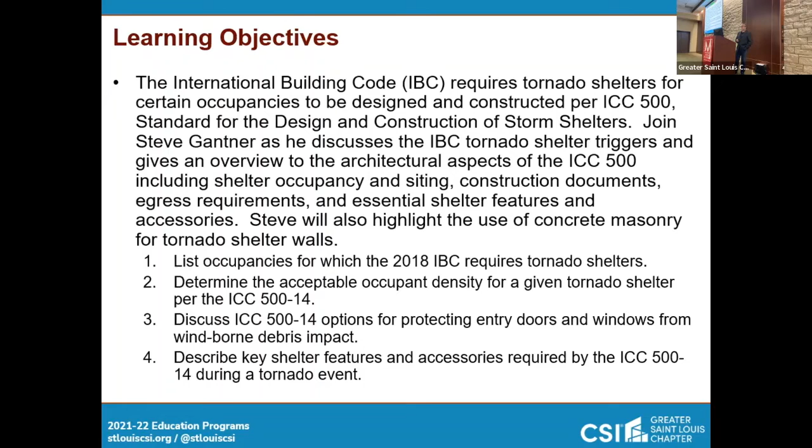So learning objectives, we're going to go through the building code tonight with you guys, and its reference to the ICC 500. And we're going to talk to you a little bit about doors, windows, windborne debris, and some key factors that go into designing a shelter and what the differences are.

One of the things I was able to participate in, if you were here in November, you heard me talk a little bit about Joplin, and this is one of the slides from that program. But I was part of the Missouri SAVE Coalition. We went down and evaluated structures, all kinds of structures, from houses to buildings to just sheds. Make sure they were safe to be used.

So this is the damage path from one end of Joplin to the other. Right here's Highway 44 coming down, and this is the heart of Joplin, basically. You can see the damage path several miles long. A little bit before and after photos for you. One street corner. Before you could see the houses, now you see nothing. And on the right-hand side, what's interesting to this one is the school fields here that you can see, and you can see them damaged here, and the path of damage that went right through there.

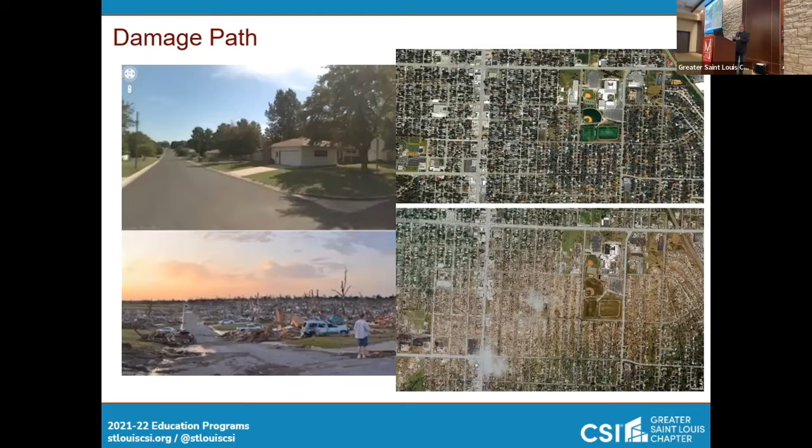One thing I can't capture on here is the smell of the town. If you've ever been up in your attic and you have that kind of musty, attic-y smell. I don't know how to describe it. It's not mold. It's insulation. It's all kinds of stuff that you're not used to smelling. That's what the town smelled like everywhere you went.

So damages, there were over 4,300 single-family houses damaged or destroyed, 3,800 damaged. Cell phone towers, there were 50 of them that were not functioning. I'll show you a photo in a minute of one of them. And 10 were destroyed.

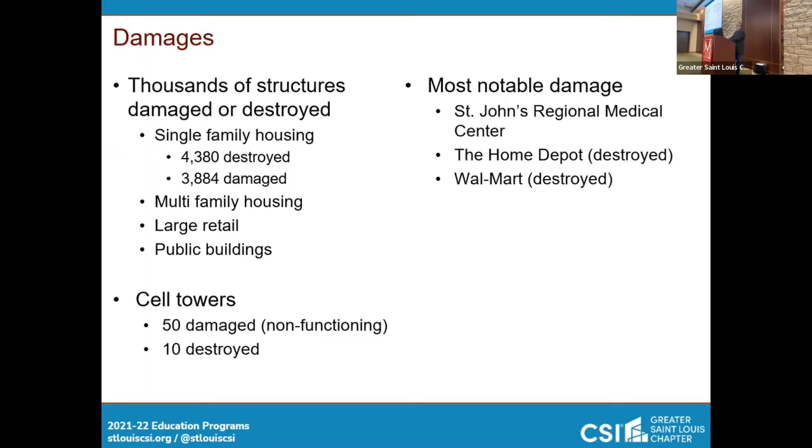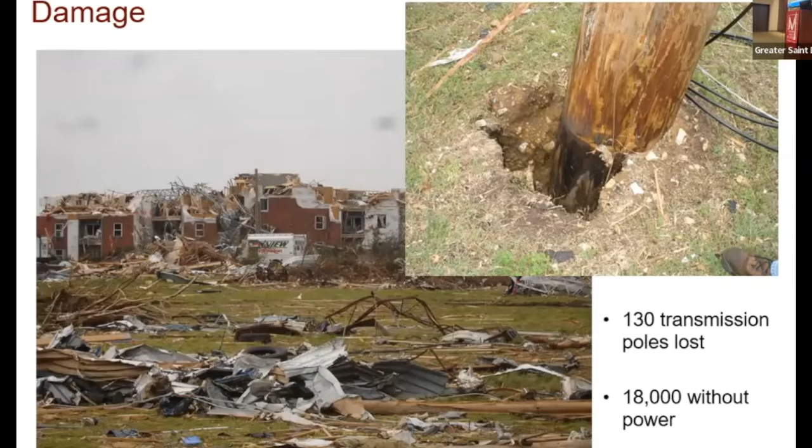Most notable damage was to St. John's Regional Medical Center. I think that's what everyone saw photos of here in St. Louis. But there's an example on the left-hand side by the truck. There you can see a communication tower laying down on top of an apartment complex. This is one of those power poles that was just kind of bent over and non-functioning.

St. John's, they had to move 183 patients out. They moved them out within 90 minutes of the tornado. Unfortunately, 5 people died, and all those people were connected to the life support systems in the facility, and it was due to power failure. And one visitor was in the hallway. I'm not quite sure how they died.

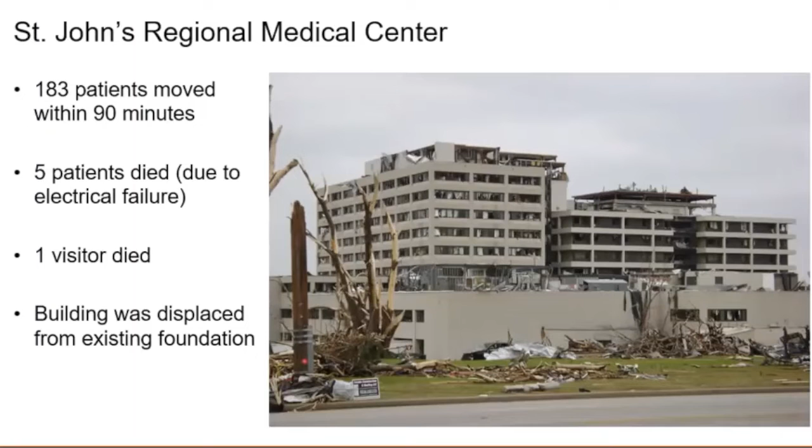I won't speculate. The building, though, was actually moved physically off of its foundation a few inches. A building that size was moved a few inches. That tells you how strong the winds are.

This is one of my favorite photos in a fascinating kind of way, not that somebody lost their home in this, because this is somebody's home. But you can see the front porch right about there. That's where the house is supposed to be, right there. Closer examination, everything looks good.

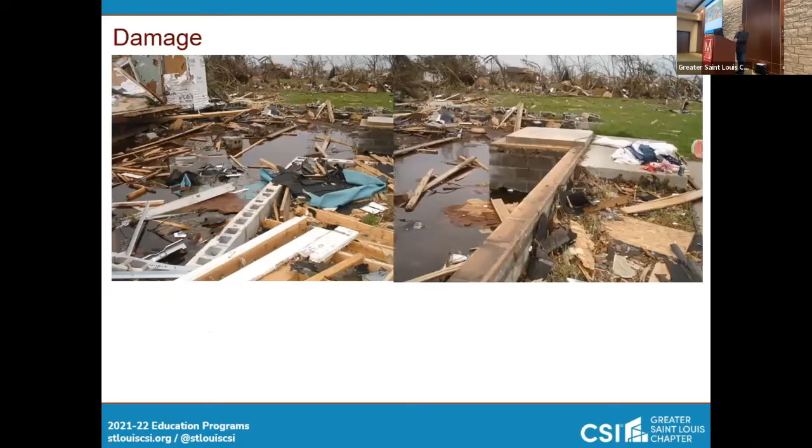The sill plate's down. You can see the anchor bolts in the sill plate. If you look a little bit in the other photo, you can see it, but this one you see it better. The top course of the masonry failed. The bond between the CMU and the top course just broke away. Took the plate, took the bolts with it, and it moved the house.

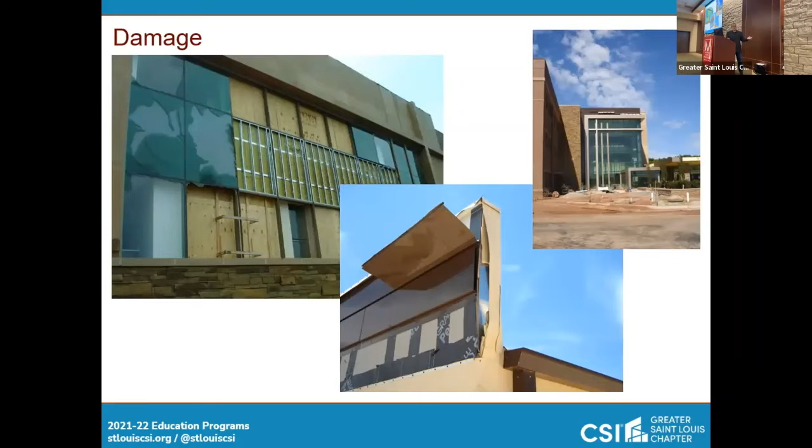What's interesting is, because I actually specified it, I know for a fact that coping up there that you see here is ANSI SPRI ES-1 certified coping, but you can see it bent. And I think they bent, speculation only. If you notice the big gap here on the left-hand side where the masonry failed. Not sure if it was a masonry failure or whatnot, but if you look on the other photos, you can see where the course is pulled off here.

I think that failure might have allowed the wind to come up under that coping and get a hold of the metal that was cleated down, and that caused the rest of the failure. But what's really interesting about this is you think, oh, that should be nothing. That doesn't appear to damage anything except you're missing some brick and you're missing your coping a little bit.

But if you turn around, that's the roof. So if that wind can get up under the coping, and then because the roofing came and flashed over the coping and was tied into the coping, the wind got underneath the roofing, which was mechanically attached first layer, fully adhered second layer, and fully adhered membrane.

But you can see the wind got under it and pulled the metal deck up in the one instance over here. And what happened was that metal deck failed. So wind, water, everything got into the building and caused significant damage inside the building. You can also see that this photo over here, the pipe coming up is for a screen for the air handling units. It was severely damaged as well.

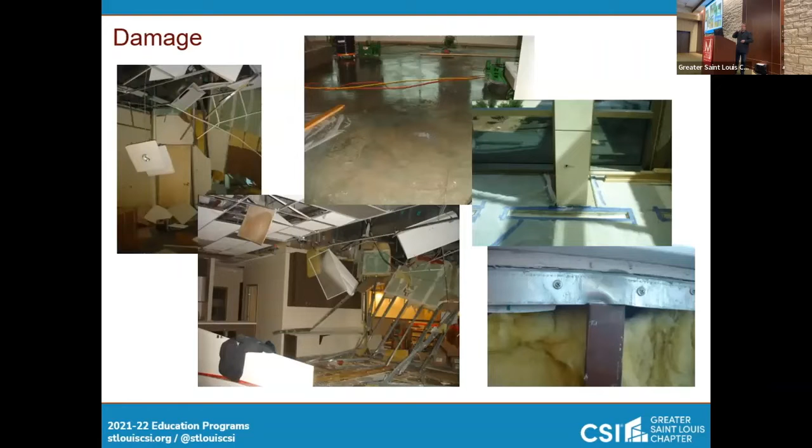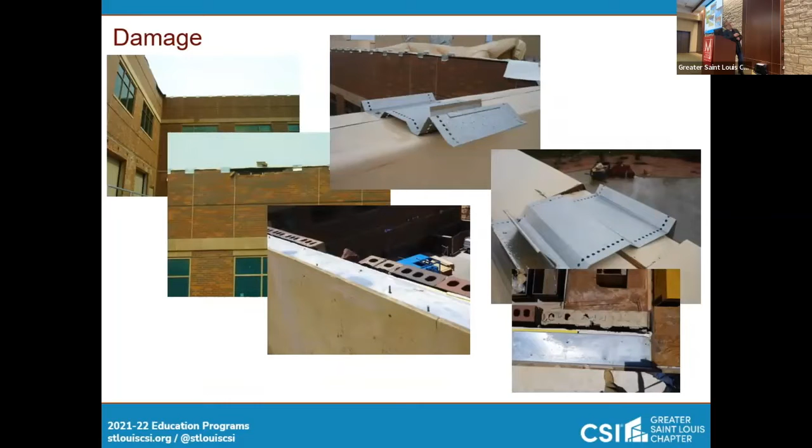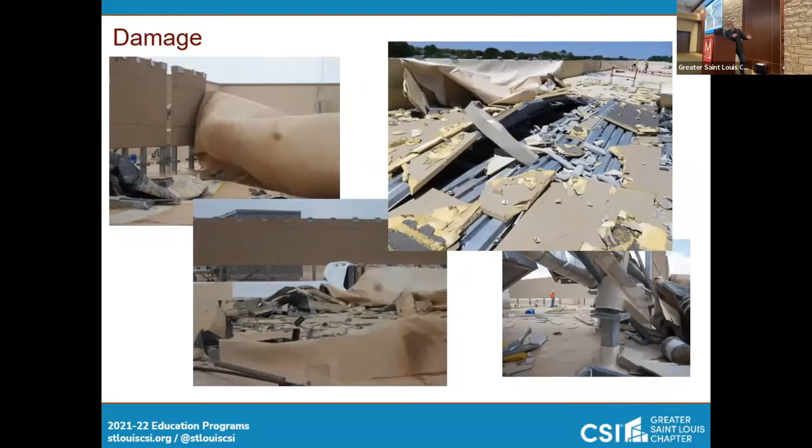Inside, a lot of damage from just wind and water that just blew through the building. The wind came in one side. You could track the path by looking in where the wind came in from. Basically that opening right there. It came in this part of the building, came down, came over here, and it blew up that part, along with the uplift of the wind, blew that up and allowed the wind to escape from that area as well. So it's fascinating how you can see how that stuff happens.

So what we're going to get into a little bit with that behind us is the IBC and where the storm sheltering information comes from. So per section 202, the IBC defines storm shelters. Take notice though, they're not tornado shelters, they're not hurricane shelters, they're just storm shelters at this point. And just for reference, I'll show you where it's defined in the code later.

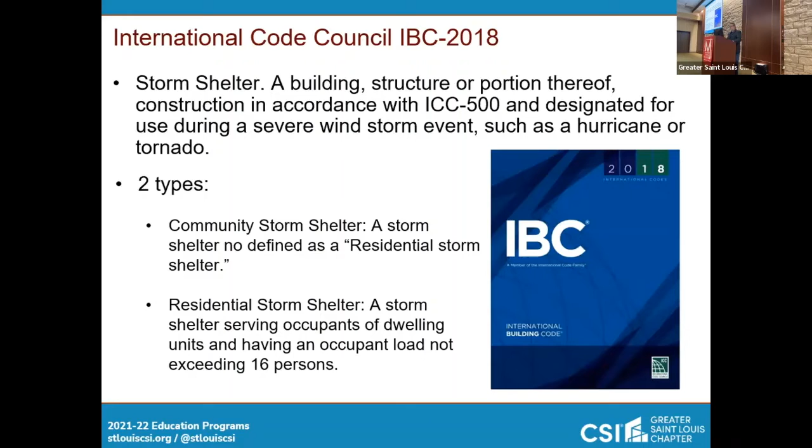But for planning purposes, you plan to stay in a tornado shelter, storm shelter for 2 hours. A hurricane design time is 24 hours. So you can see there's a little bit of difference as we go through different aspects of the building code. The general component of the IBC applies to construction of storm shelters constructed as separate detached buildings or constructed as rooms or spaces within a building.

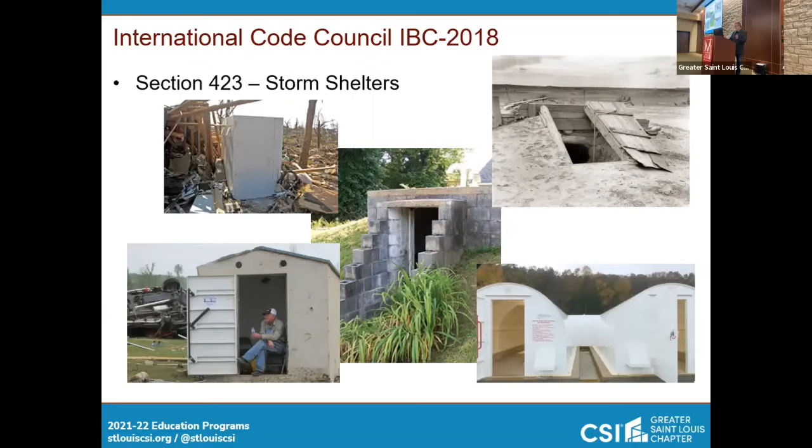For the purpose of providing protection from storms that produce high winds, such structures shall be designed to be hurricane shelters, tornado shelters, or combined hurricane tornado shelters. That's language right out of the building code. Design of these facilities for use as emergency shelters after the storm are outside of the scope of ICC 500 and shall comply with table 1604.5 risk category IV structures.

So we're going to go outside of ICC right now. We're going to see what the building code says about what types of occupancies need to have storm shelters or emergency shelters, which is two different terms. Emergency shelters have to function, they're essential facilities. They have to function after the event has happened. So they need to be able to occupy them after the tornado or the hurricane has gone through.

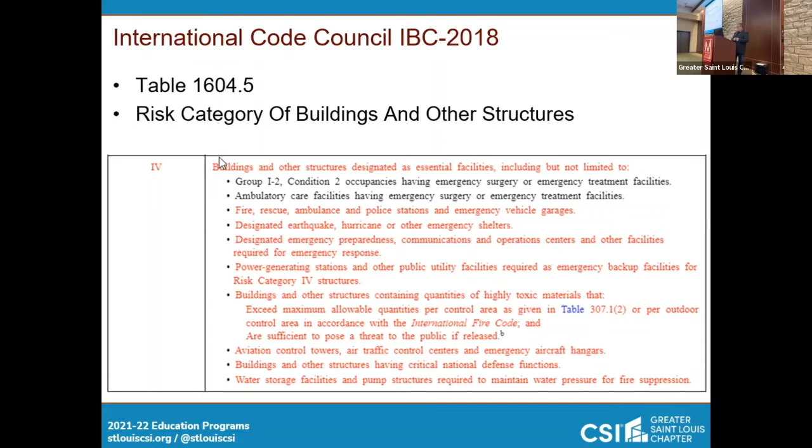And you need to build them according to IBC 2018 here, the criteria in this table. Where a building or structure is occupied by 2 or more occupancies not included in the same risk category. Okay, so your risk categories here are, you can see up there, ambulatory care facilities, fire rescue ambulance. But if you have a structure associated with it, that's what we're talking about, shall be assigned the classification of the highest risk category corresponding to the various occupancies.

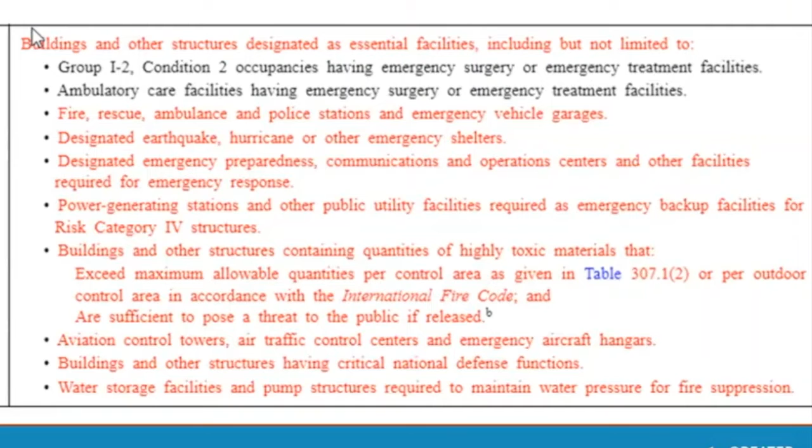So if it's tied to it, if a fire station is tied to a community center, the community center automatically comes up to that level of design. Critical emergency operations, 911 call centers, emergency operations. The interesting thing is Group E. When the occupancy is 50 or more, it has to function as a storm shelter constructed in accordance with ICC 500. The only exceptions are Group E daycare facilities,

Group E occupancies as accessories to places of worship. Now, I don't know how that really applies because I know there's some churches that have schools associated with them. I would hope that they would take care to have some storm sheltering somewhere in that facility if it's being built new. Retrofitting is becoming more common, but new ones, I would hope they do the same. And then buildings that meet the requirements of shelter design in ICC 500 don't have to comply.

Okay, so we're still in IBC, but we're going to talk about occupant capacity. The required occupant capacity of the storm shelter shall include all of the buildings on the site and shall be the greater of the following. There's two criteria: the total occupant load of the classroom, vocational room, and offices in the Group E occupancy, and the occupant load of any interior assembly space that is associated with the Group E occupancy. So there's where you're getting your churches covered a little bit.

There are exceptions, as everything in the building code, right? Where a new building is being added on an existing Group E site, and where the new building is not of sufficient size to accommodate the required occupant capacity, the storm shelter shall at a minimum accommodate the required occupancy of the new building. Okay? Hopefully that makes some sense: building a building, you don't have to accommodate the old building, but the new one has to be.

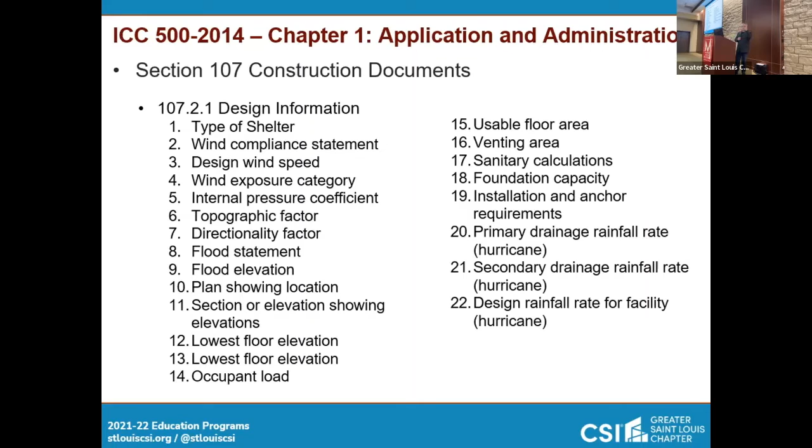So for the first one: residential or community, tornado, hurricane, or a combination of both. So that's the type of shelter. You get 3 choices on that one. The second one is a statement that the wind design conforms to the provisions of the ICC 500 code with the edition year specified. So you need to tell them which version you're using, making sure it's compliant. And then the shelter wind speed in miles per hour. I'll show you the chart in just a minute, but that map of the United States had the wind speeds in it. Just for reference.

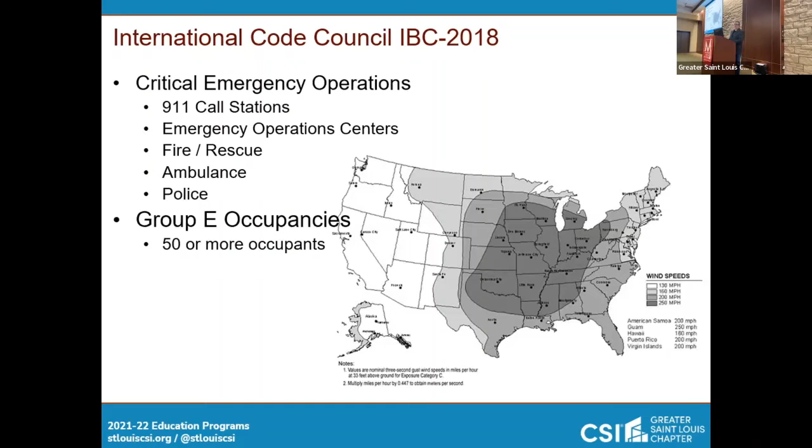They don't have to do too much. They just have to design to a 3-second gust of 130 miles an hour. Whereas the dark gray area here in the middle, where the bullseye's right there about St. Louis, our peak wind gust is 250 miles an hour with 3-second wind bursts. So a little idea of the wind speeds we're talking about.

The wind exposure category, item number 4. That's important because the code defaults to exposure category C, which is basically flat open terrain. And the hurricanes also default to C, but there are provisions to go to B on that one. But for that purpose, it cannot be an urban area.

Item number 8, the statement that the shelter has or has not been constructed within an area susceptible to flooding. We don't want to trap all these people inside of a storm shelter and have them drown. That would be horrible. Then we have to get into a few other things: design flood elevation and base flood elevation. More about that a little bit later.

A floor plan drawing or image, item 10, indicating location of the storm shelter on a site or within a building or facility, including a drawing or image indicating the entire facility. And then you have to provide them some sections and elevations, the heights of the storm shelters related to finished grade.

Venting area is also critically important. We need to show them how much venting you're providing within the shelter. That's a requirement that we'll cover in chapter 7. And then, believe it or not, there are sanitation facilities required in storm shelters, community ones, not residential. And then foundation requirements and shelter installation requirements, including anchor location and minimum required capacity.

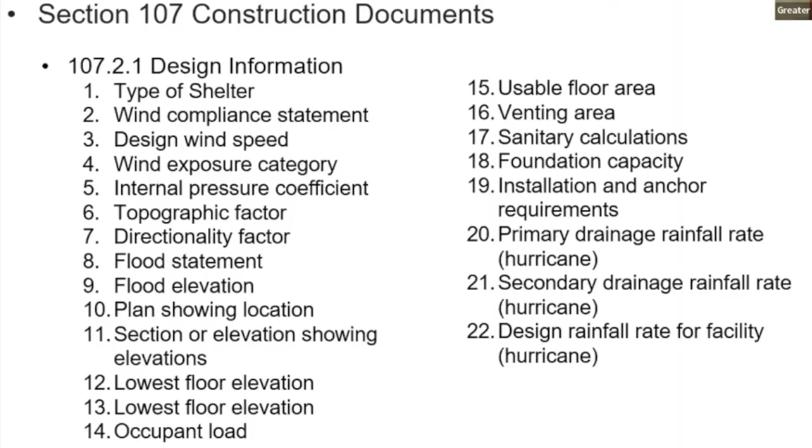So this isn't something that your typical architect's going to do. They're going to call an engineer to design these anchors to make sure that they can withstand the pullout. If you design your shelter right too, you also have a safe place to go in the event of an earthquake. So we have the added bonus here in St. Louis of having that. So the next one, we talked a little bit about the map, what you're going to show them.

107.2.2 enclosures. When a storm shelter is to be constructed as a portion of a host, the walls and floors enclosing the shelter shall be clearly indicated on the drawings. This is a drawing from Oklahoma State University, and in orange you can see where all of the storm shelters are on their campus. Being in Oklahoma City, it makes a lot of sense. You want to have a lot of storm shelters.

The other thing you have to do is note your sign. You note your shelter. Requirements for this are you're going to tell them how much the wind speed was designed for, the missile impact resistance, what it was designed to, and we're going to cover missile impact. And I tried to find some videos to show you guys of that. If you haven't seen it, it's pretty fantastic. Just fun, brain candy. You're going to have inspections of your facility as it's being built. Make sure that everything is being built according to the plans, drawings, and specs.

Any special details you have to note on your drawings. And then special instructions. So construction documents shall provide or include any special details or special instructions required for the functional operation of the shelter. So we're talking about things like equipment and amenities that are required within the shelter that include water, sanitary, fire extinguishers, batteries, flashlights, emergency lighting, and other equipment required in Chapter 7 to be installed, and the specification for any alarm system to be installed.

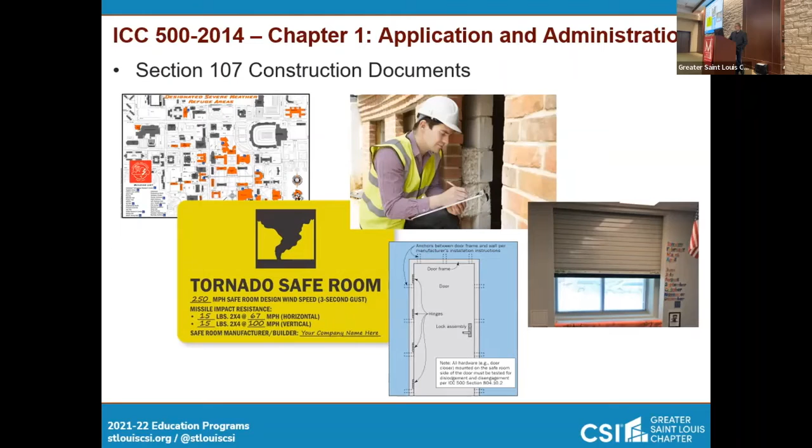The third item on that point, though, like this storm window here, this coiling door, protection for the window. Looks like it's in a classroom. That's the easiest way to do it. If you build your outside walls out of masonry, you can achieve a tornado shelter fairly easily from the horizontal impact. The vertical one on the roof is a little more difficult to attain. But if you have a 4-inch concrete slab, you're pretty covered.

But the third item, special instructions for the deployment of any special protection equipment, such as shutters, screens, special latching for doors or windows, any equipment or switching, electrical, plumbing. You have to have notification within the shelter of how to operate those.

Construction documents also have to have a quality assurance plan with detailed requirements. Some of them are showing the roof cladding, soffits and roof framing connections. Remember that house that was connected to the foundation? They want to see how it's connected. They want to see the main wind force resisting system, including your braced frames, wall cladding and the cladding connections, critical support systems and connections, and if it's a prefabricated shelter, what the foundation loads are for those.

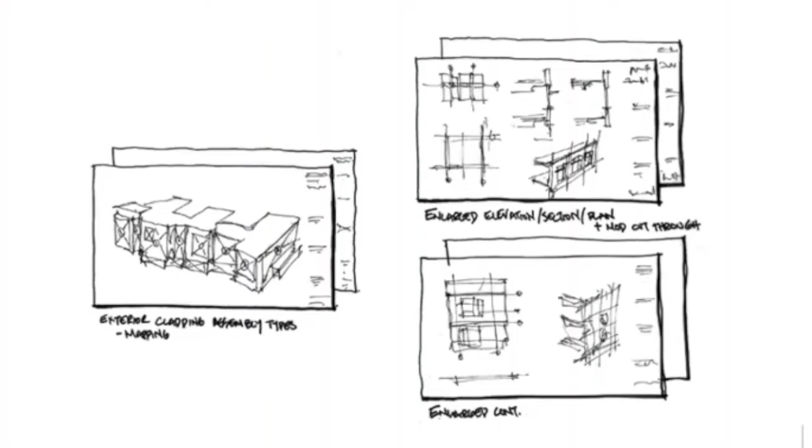Quality assurance plan preparation, similar items. They want the main wind force resisting system. They want to see your special inspections and testing, what's going to be on there. The structural observations performed in accordance with 106.4, and the required distribution, who gets the test reports, most likely the architect, structural engineer, and the AHJ.

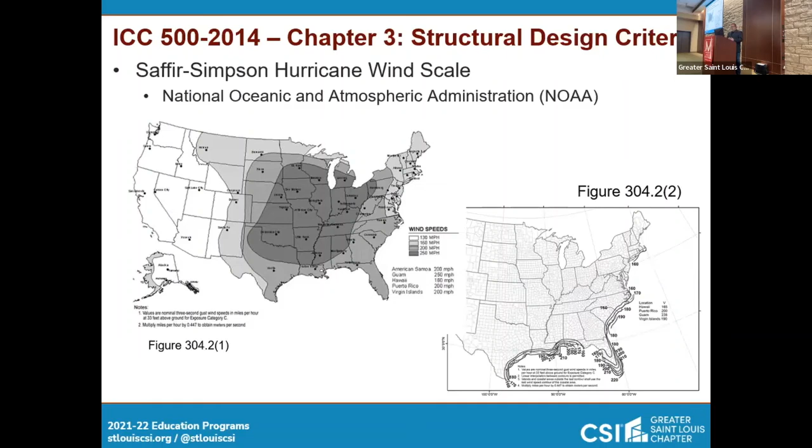So now let's talk about chapter 3, which is the structural design criteria, and we're going to talk about wind loads for a minute. I'm not going to cover design of the facility. This is more engineering heavy, but the important components we'll cover here. Design wind speed for tornado shelters shall be in accordance with figure 304.2.1, which is the United States map with our 250 mile per hour wind.

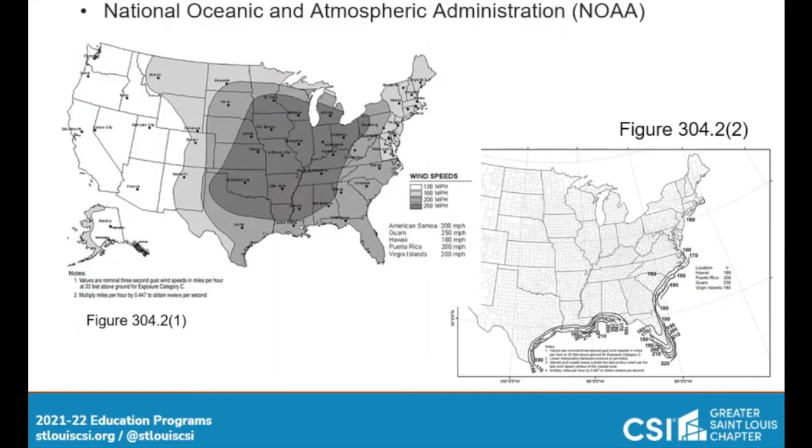And then hurricane is 304.2. Wind peak gust speeds at 3 seconds measured at 33 feet above finished grade. And you probably can't see because it's really small. It's over here. I'll read it to you guys. Wind speeds are going to be anywhere from 160 miles an hour to 235 miles an hour gusts.

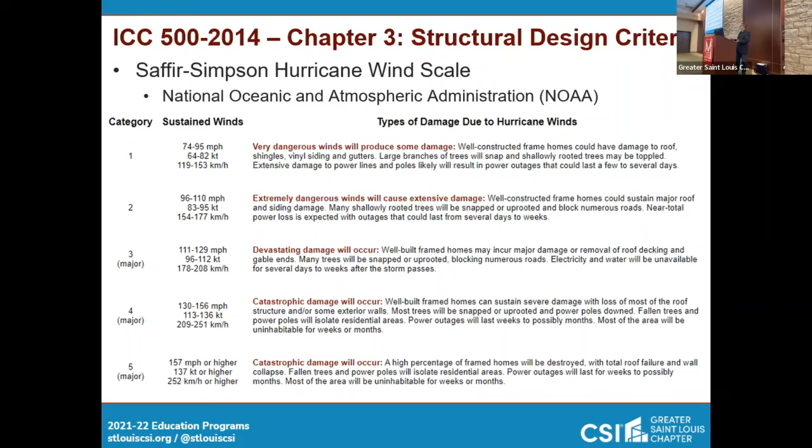So like tornadoes, I mentioned the EF scale. Hurricanes have their scales. You're familiar with them because you've heard them on the news. Category 1, 2, 3, 4, 5, where 1 is dangerous. Got to respect it. It's still a storm. But 5 being the worst one, get the heck out of Dodge if you can. You don't want to be around it. But if you look, the sustained winds are 157 miles per hour or higher. It's not too bad, is it? We got to do 250.

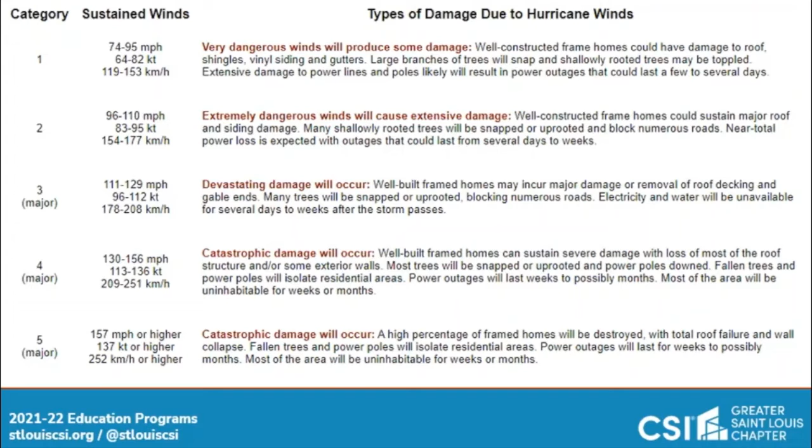No? So I had a little fun with this. The coastal states say, we have some strong winds in the hurricanes. Like, yeah, right. Hold my beer.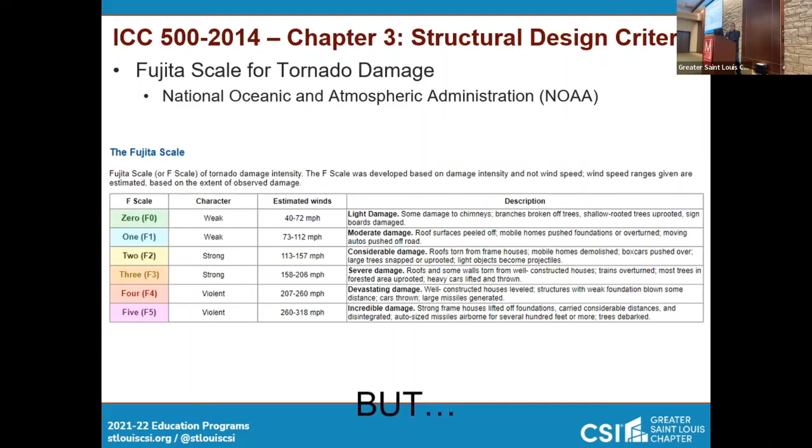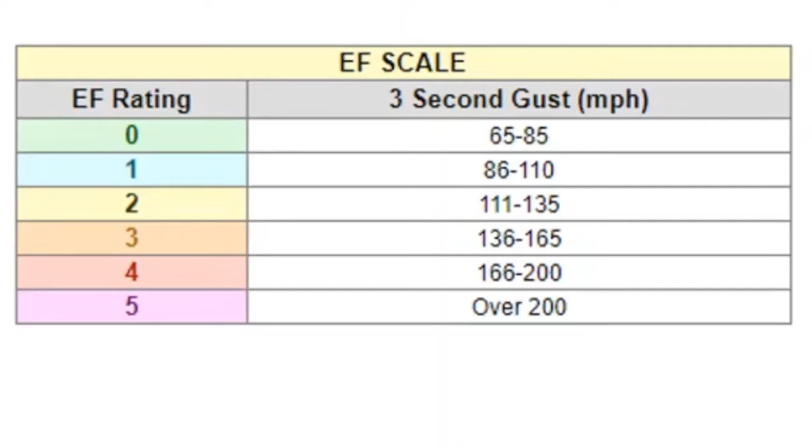So originally, the Fujita scale was 0 to 5, F0 to F5. And you can see the wind speeds are significantly higher here. I'm not quite sure exactly why, but EF numbers got introduced in 2007 and brought the numbers down for how they categorize the damage from the storms. So you can see the double vortex tornado in Joplin was a 5. So they know they had 3-second gusts of over 200 miles an hour. That's just incredible in my mind, those sustained winds.

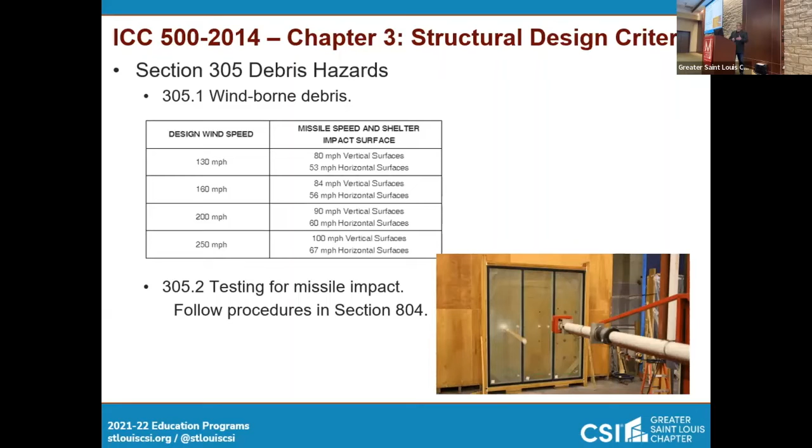The fun part, debris hazards. And I say that fun as in it's interesting to watch the tests. I'm glad they're doing the tests because I feel safe inside the buildings. But the windborne debris, what you have to design to, we're going to use our area, St. Louis, Missouri, 250 miles per hour wind. So what does that mean? They're going to take this nice little cannon here, take a 15-pound 2x4, and they're going to shoot it at the vertical surface at 100 miles an hour. If it passes all the tests, then it's certified for our area.

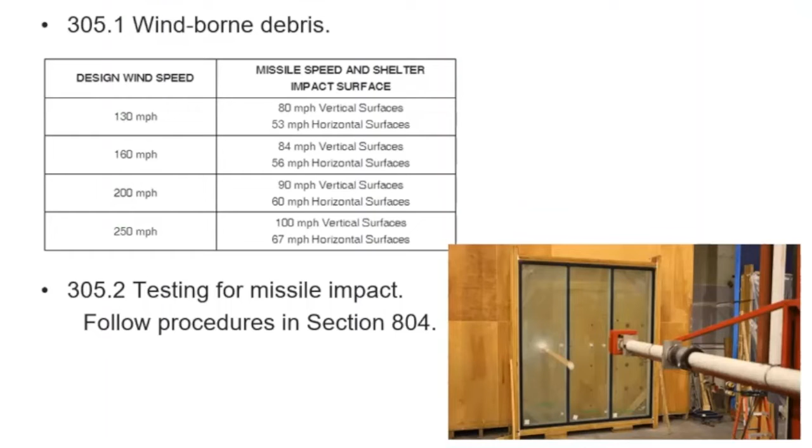Likewise, the horizontal surface will get tested in the same way. They measure, though, horizontal and vertical a little bit differently. They give you some criteria because dirt covering the shelter 12 inches deep negates the need for the test for 67 miles an hour. And also, you can go from vertical to horizontal at a 30-degree angle. 30 degrees or less, it's considered a horizontal surface. 30 degrees or more, it's considered a vertical surface.

Now, where do we put these things on the site? We already talked about floods. Seems straightforward, right? Not really. Elevation corresponding to the highest recorded flood elevation. That makes sense to me. Maximum flood elevation associated with a modeled hurricane. That's a hurricane, don't care. Minimum elevation of the lowest floor required by the authority having jurisdiction. Okay, that one we may pay attention to.

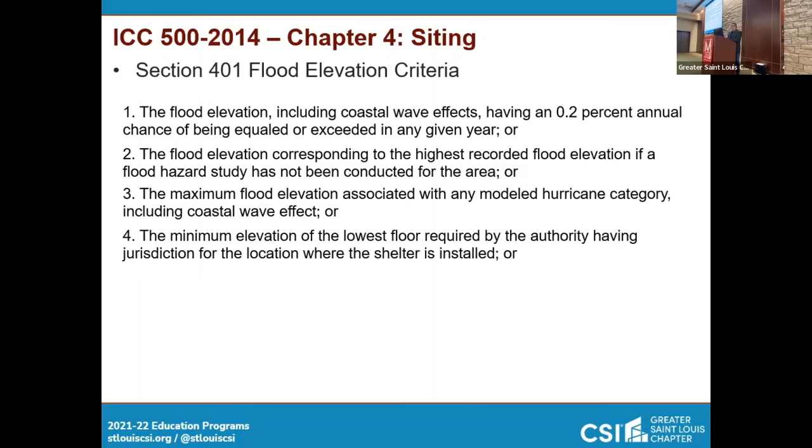And then 2 feet above the flood elevation given a 1% annual chance of being equaled or exceeded. Seems like that's happening every year now. Somebody exceeds a floodplain that 500 years ago wasn't supposed to be possible. But so that leaves us with, well, exceptions. Sorry, always exceptions. Items 1 and 3 shall not apply to shelters designed, constructed, designated only as tornado shelters. So let's just take those guys out. So what do?

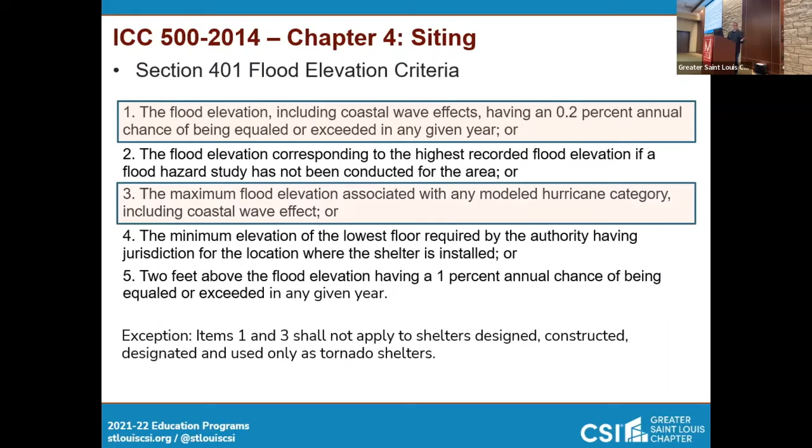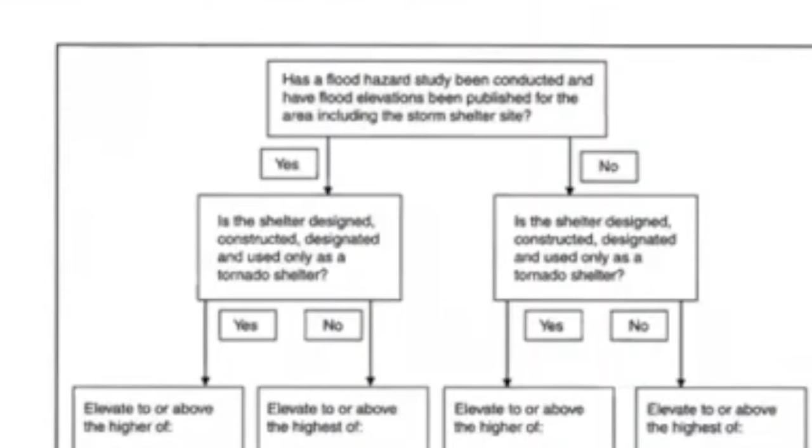We all like flow charts, and I'm sorry, that's going to be an eye exam. But basically what it says at the very top is, has a flood hazard study been conducted and have flood elevations been published for the area, including the storm shelter site? Yes is on the left, no is on the right. Let's go yes. Is the shelter designed, constructed, designated, and used only as a tornado shelter? Yes on the left, no on the right. So let's go to the left.

So we've got to elevate to or above the higher of the minimum elevation required by the AHJ, or 2 feet above the 1% annual chance flood elevation. A little bit easier to calculate if you know about what it is because of the flood hazard study. If you don't have one, then you go to the other side of the table, over here. And we're going to stay on this path here because it's only going to be used as a tornado shelter. So we're going to use item 2, highest recorded flood elevation, or the minimum elevation required by the AHJ. Basically that's what that says.

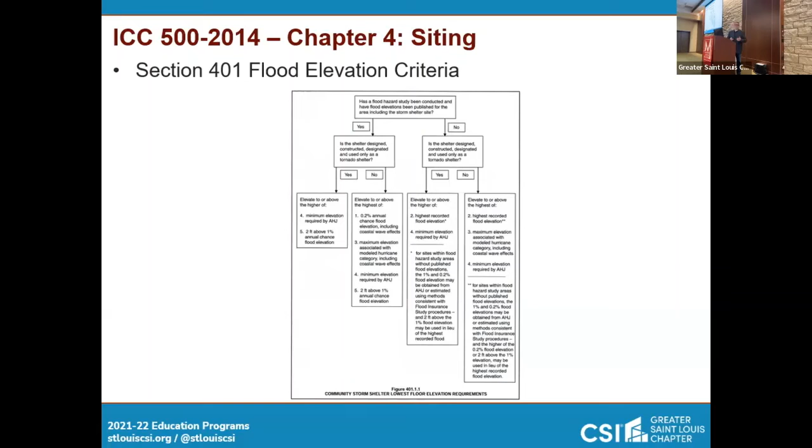They also have criteria for hazardous materials. You cannot put a storm shelter in a location that is subject to hazardous materials getting damaged by a wind event. That's a no-no because they do not want you to be subjected to those chemicals, whatever the hazard is that's being stored there. That's all I'm going to cover on chemicals. It's a special case and you would get into it if you're in an industrial area. I highly doubt they're going to put a pipeline near a school, but know that it's there in case you need to get into that.

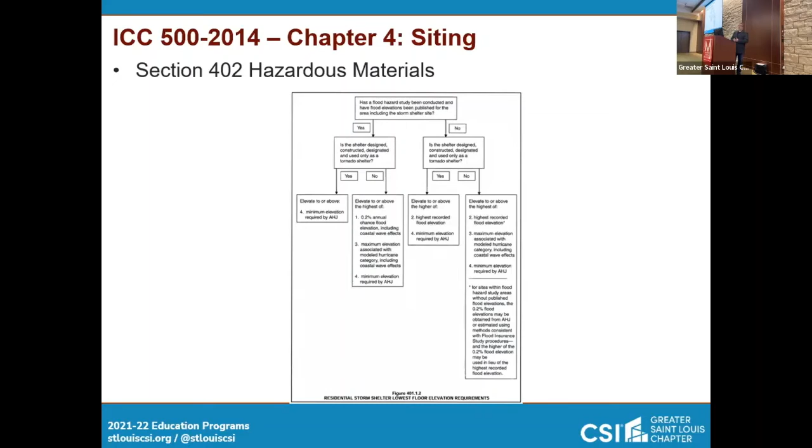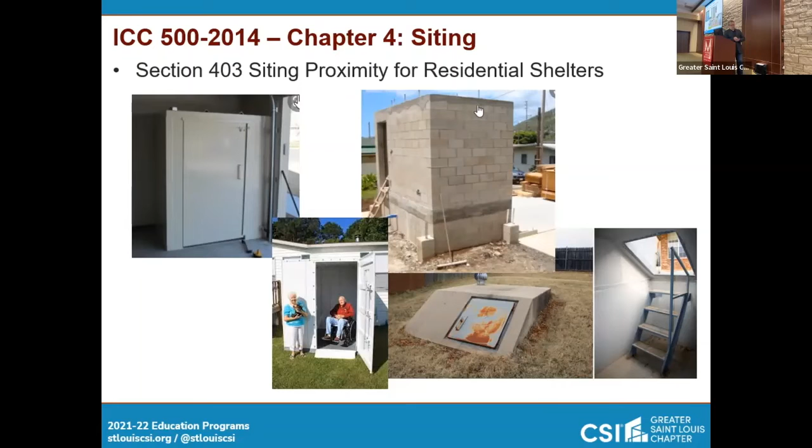So section 403, siting proximity for residential shelters. And these are some examples just for your information. This is a prefabricated one. Looks like someone bolted it to their garage floor. 4 inches of concrete with a proper anchorage. That's a great shelter. Grandma and grandpa in their tornado shelter. They're going to be safe. Got some old fashioned ones here going down inside. And then my favorite, the all masonry one. Why not put a bathroom in there in your house? No, put it in the basement.

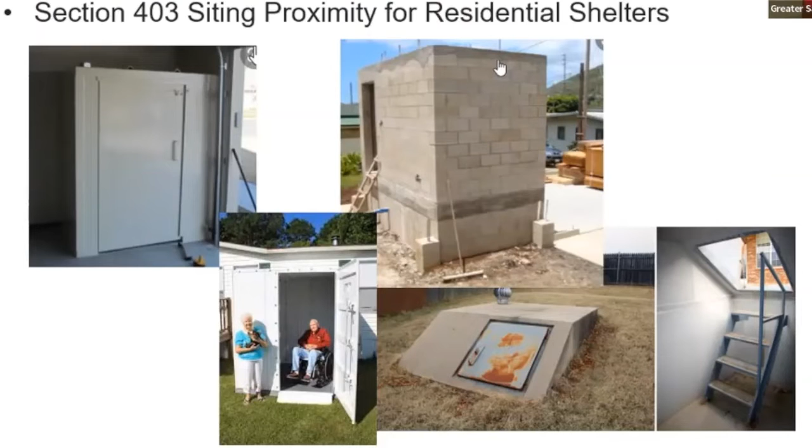But residential tornado shelters shall be located within the residence that the shelter is intended to serve, so in the building, or located on the site such that the maximum travel distance of at least one path from an access opening to the shelter does not exceed 150 feet. So if you're going to go in the ground out back, make sure that door is within 150 feet of your back door.

Community shelters are different. They should be located outside the following high-risk flood hazards, subject to high-velocity wind or wave action. That's a hurricane. We don't need to worry about that. And then floodways. They can be located within flood hazards, though, that are subject to high waves if you get permission. So the AHJ can override everything.

A little bit on occupancy. Tornado up here on the very top. Standing or seated, 5 square feet per person. Right below that, wheelchair gets 10 square feet per person. And bedridden is 30 square feet per person. So if you're in a hospital, that's where that one would come into play. You can bring people down from the ICU or from their rooms.

Hurricanes are a little different. Remember, two hours versus 24 hours. So you're gonna need a little more space to sit and kind of walk around, wiggle around. That's 20 square feet for standing or seated, 20 for wheelchairs, or 40 for bedridden.

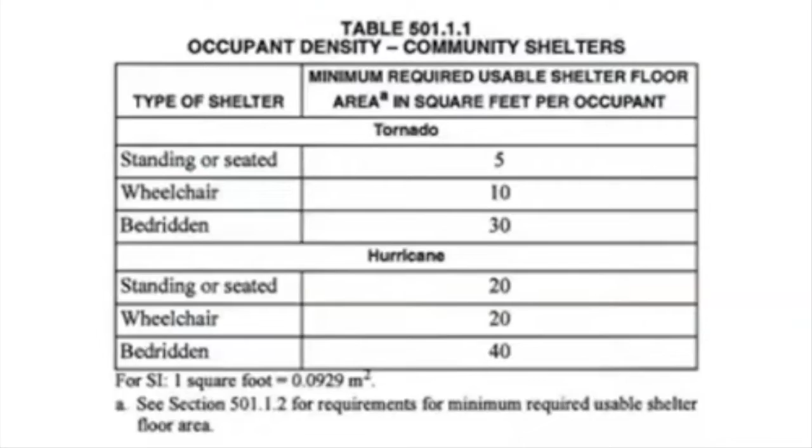Okay, now the fun part. The usable shelter floor area shall be determined by using the following percentages. It's a lot of math. I really didn't want to. There are 3 items you can do it with, and I'll read them to you really quick because they're really interesting. I think it'd be hard to do, and there's an option that makes it easier. Reduce the gross floor area of the shelter areas with areas of concentrated furnishings or fixed seating by a minimum of 50%.

Okay. Reduce the gross floor area of the shelter areas with areas of unconcentrated furnishings and without fixed seating by a minimum of 35%. Reduce the gross floor area of shelter areas with areas of open plan furnishings and without fixed seating by a minimum of 15%. Seems like a lot of work to figure it out. They give you this nice alternative.

The usable shelter floor area shall be determined by subtracting from the gross floor area the floor area of partitions and walls, columns, and fixed or movable objects, furniture, equipment, or other features that under probable conditions cannot be removed. So basically whatever is in the space, take that square footage out of the space, and that is your usable space. So these tables are movable, but in the event of a tornado, we would not take the time to move them. So it's the square footage around the tables that would work.

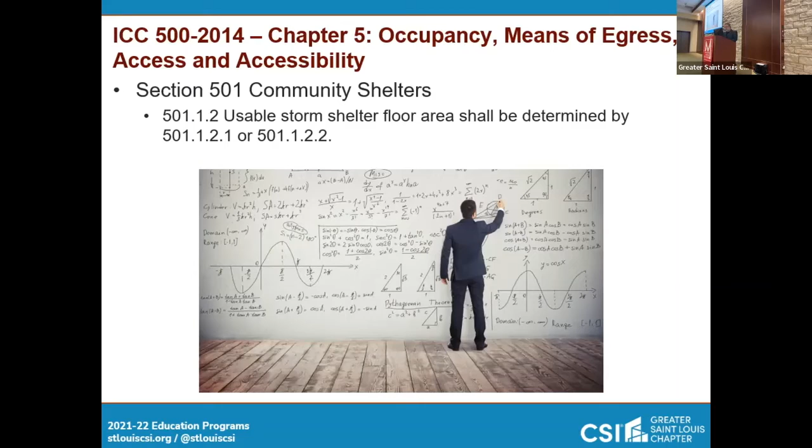Wheelchair bound. Each storm shelter shall be sized to accommodate a minimum of 1 wheelchair for every 200 shelter occupants. I just had a little fun with this one after that last math slide, which got me thinking. So if 200 is 1 wheelchair, 400 is almost double. That's just 2 wheelchairs. I think you have more people in wheelchairs, but, and then the obscene number of wheelchairs.

So number of doors in a community shelter. This is what we would design. This room could be a community shelter if we had beefed up the roof, because that's a 6-inch thick concrete masonry wall out there. All around us is 6-inch CMU. I believe the block has been tested, but I don't know that for a fact. But we could close the doors. There's a number of things that could make this a safe room.

But the number of doors, means of egress doors, shall be determined based upon the occupant load for the normal occupancy of the space in accordance with the applicable building code. For facilities used solely for shelters, the number of doors shall be determined in accordance with the applicable building code based upon the occupant load. So go by the building code. That's the number of exits you have to have.

All right. Exceptions. Shelters having an occupant load not exceeding 16 are not required to have an emergency escape opening. So we don't have to have an emergency escape opening for residential. That would be your opening like in a lower level bedroom, below grade, 24 by 30, I believe. I got it in here somewhere.

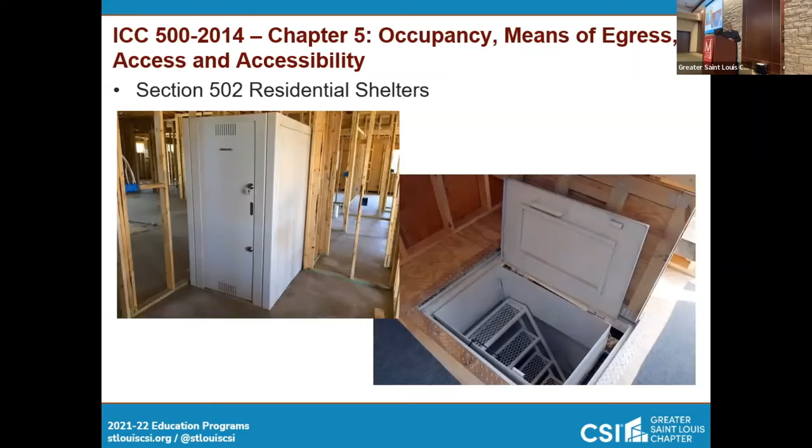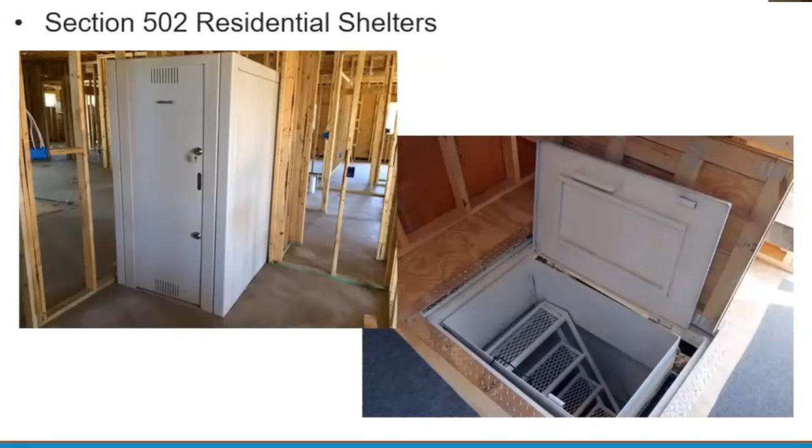Residential shelters, like I said, the bolted down type, or this one looks like it's in an area off of a living room or something over here. All residential shelters shall be provided with a method of entry and egress with minimum clear opening of 24 by 30. And then vertical access, like the one on the right, for residential shall be by a stair complying with section 502.3 of the building code. I'm not going to get into the weeds on the means of egress from stairs because that's in the regular building code.

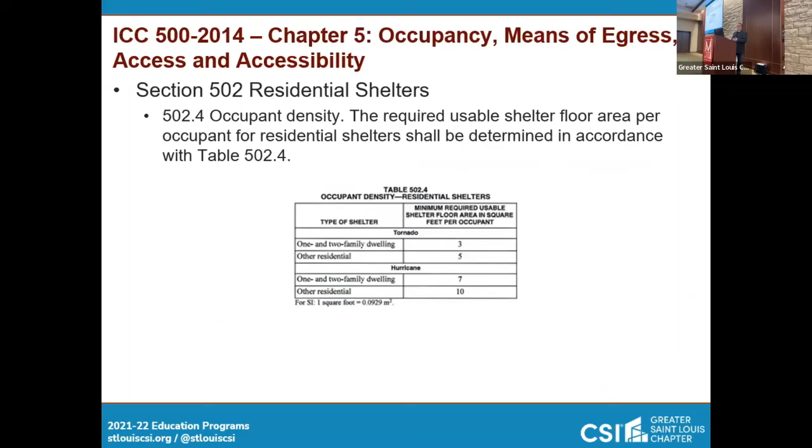So we saw the occupant load for community shelters. For residential, it's a little different. Tornado, 1 and 2 family dwellings is 3 square feet per person, as opposed to a hurricane, which is 7 square feet per person. And then other residential, I'm assuming they're talking apartment complexes or attached residences, 5 square feet. And then for hurricanes, 10 square feet.

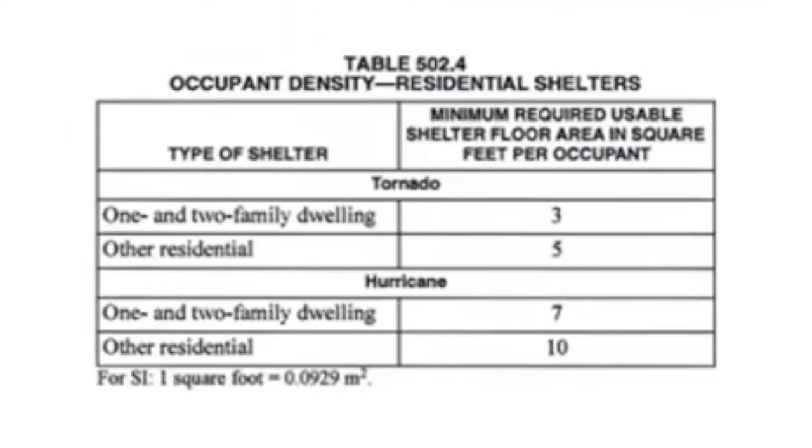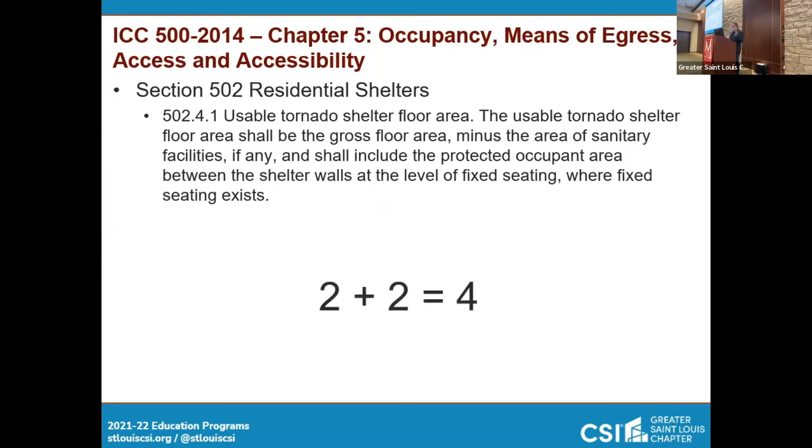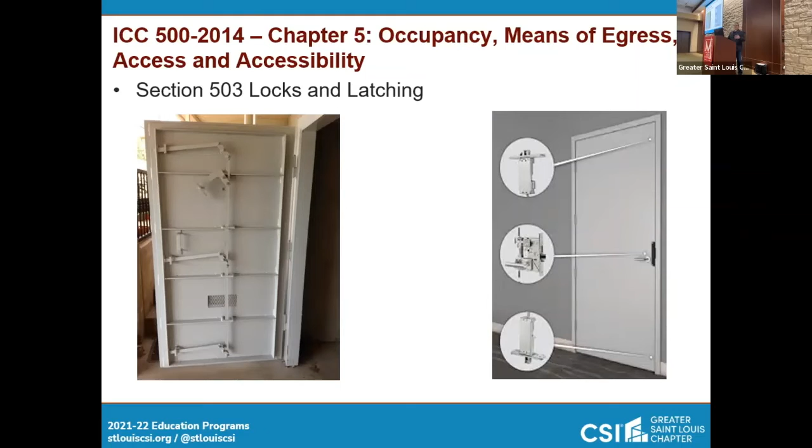Hey, what happened to the pin? We're all going to die.

Multi-latching systems are not categorized as a means of egress escape and are provided with more than one single action latching mechanism, and they shall be provided with permanently posted instructions. So that one looks like it's a multi-latching, but a single use, so that one doesn't count. But if you had to push a pin up into the ceiling, up into the jamb, down into the floor and into the jamb, that would require permanently labeled instructions saying, make sure you get all those connected.

Door latching hardware necessary for the door assembly shall automatically engage when the door is in a closed position and shall not be capable of being disabled or be capable of being engaged by an occupant, and signage shall be provided with instructions for latching the door for the emergency shelter use. Combined safe room, tornado safe room, and hurricane safe rooms all have to be labeled so that people know where to go in the event of an emergency.

Fire resistant construction. Fire barriers and horizontal assemblies separating spaces or areas designated as storm shelters shall have a minimum fire resistance rating of 2 hours and shall be constructed in accordance with the applicable part of the building code. The only exception is the fire separation assemblies; you don't have to have them in a residential shelter. But again, if you're going to do a masonry wall, your fire resistance rating is already built into it because you're going to grout every cell solid and you've got a nice tornado resistant wall.

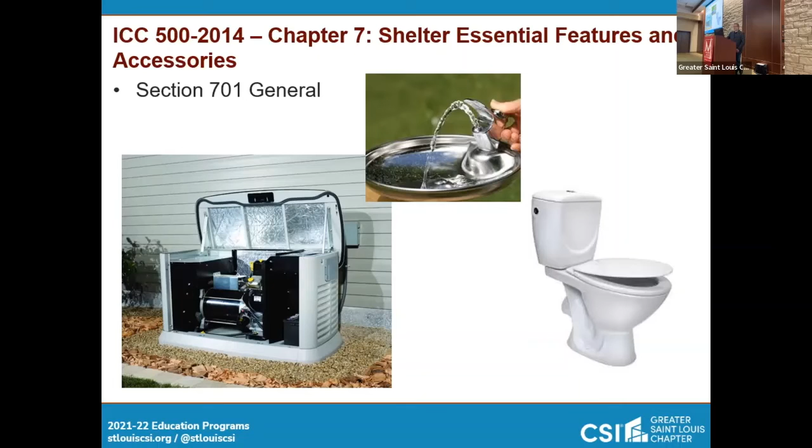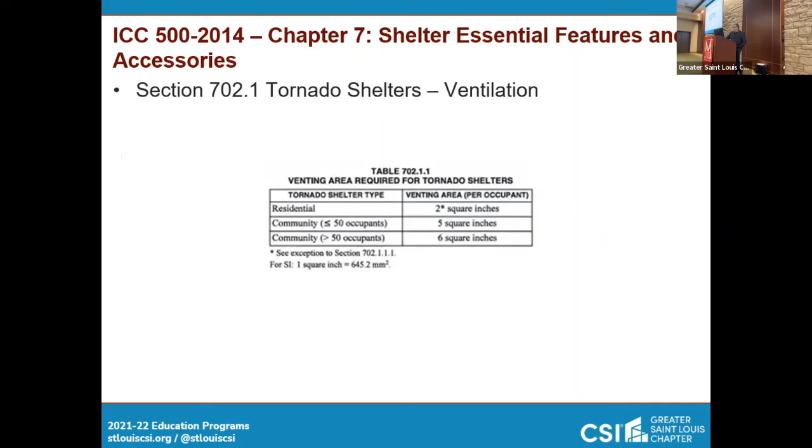Ventilation, minimum requirements for ventilation, you have to have it. Natural ventilation shall comply with 702.1.1, basically saying the location of the openings is determined by your calculations. The top part, residential, is 2 square inches per occupant. 50 or less occupants is 5 square inches per occupant, and more than 50 is 6 square inches per occupant. And that can be mechanical or natural. But if it's natural, it has to be clear area, but you have to protect the openings. I'll show you an example of that in a minute.

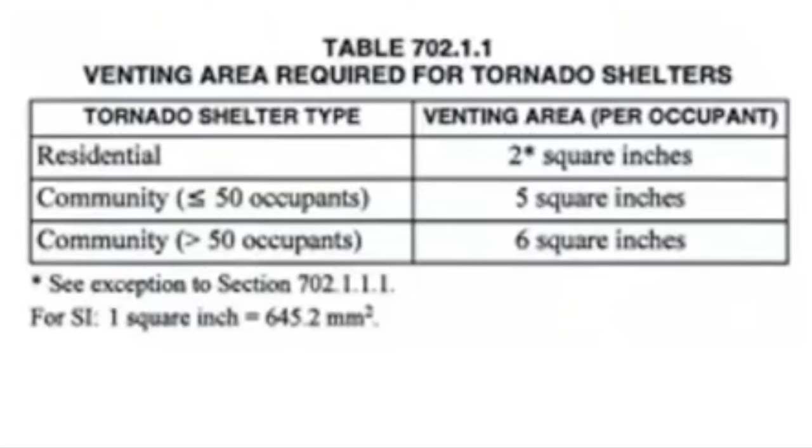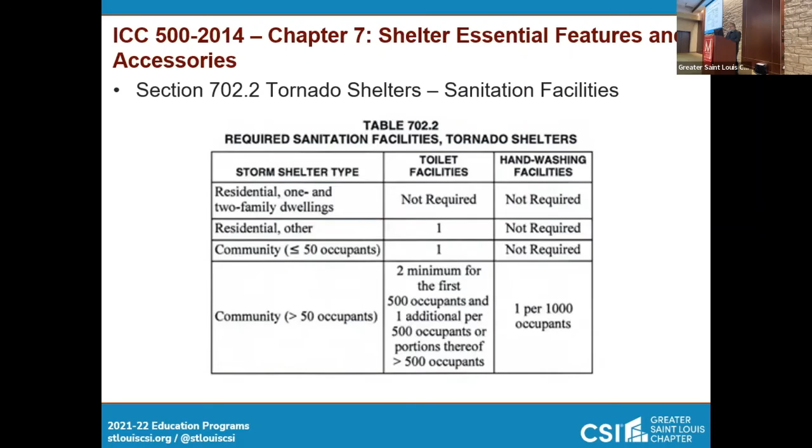Sanitation facilities: not required for toilet or hand washing in residential. Other residential, you have to have a toilet, but you don't have to have a hand washing facility. Community centers, you are required to have 2. I'm just reading it in case you can't see it. 2 minimum for the first 500 and 1 additional per 500 or portion thereof. Hand washing, 1 per 1,000 occupants. And this is for tornado shelters, not hurricane. Emergency lighting shall be provided in community shelters, a minimum average of 1 foot candle in the occupied shelter.

Emergency electrical power shall be designed to provide continuously for a minimum of 2 hours. The exception here is personal use flashlights shall be permitted for the emergency lighting system for tornado shelters with an occupant load of less than or equal to 50 when provided at a quantity of not less than 1 per 10. So on occasion, you can use a flashlight and get away with it, or those break lights, 1 foot candle.

It's what you need. First aid kit. It's a good idea to have one. It's not required for anything unless the shelter is greater than 50. But even in a residential one, I'd put one in there. They're cheap and it's a good preventative thing to have.

This next part, I'm just going to tell you that Section 703 exists. It's basically what we just went through with tornadoes, but it's specifically for hurricanes on ventilation, sanitary facilities, other essential features. Okay, it's just greater numbers because the time you're going to spend in it is greater.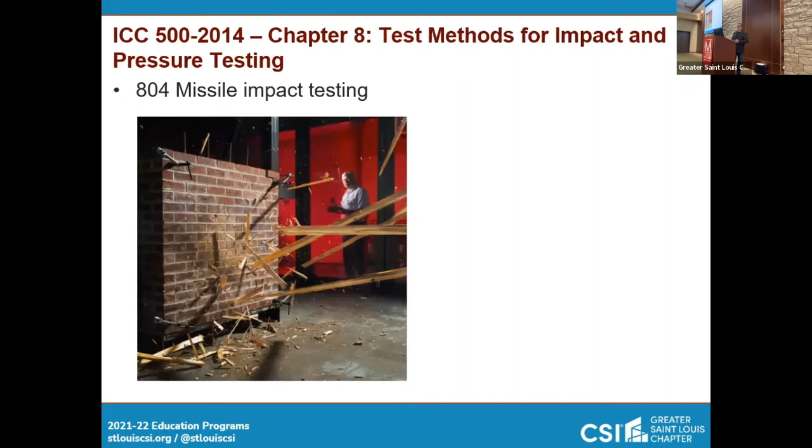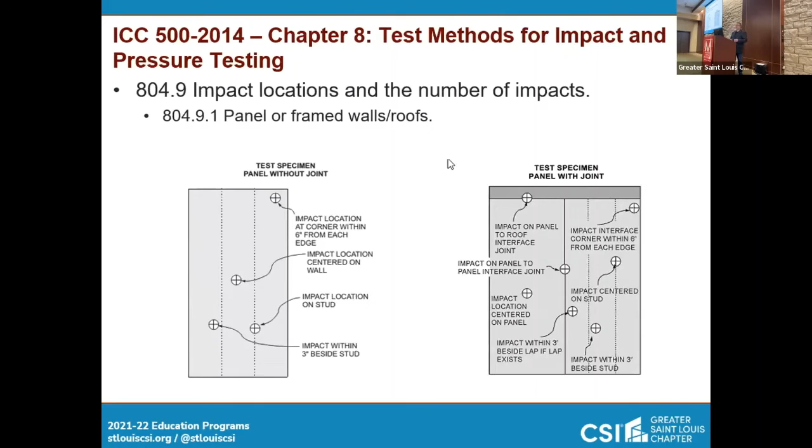Now the fun part, missile impact testing. This is where the construction of the facility comes in handy, and knowing the materials that you're going to use and how they can protect the occupants. So on a panel, just think framed wall or roof, typical house or commercial construction. You're going to have a test, and you're going to have to test this panel in 4 locations. But the key component here is no more than 3 impacts shall be made on 1 specimen.

Well, we're telling you to do 4. You can't do more than 3, unless you get permission from the owner of the facility and the testing laboratory. So if you have a door and you don't want to pay for the test, you want to take a gamble and shoot it 4 times, go for it. As long as the facility testing will allow you to do it and you own the building.

So the impact location, similar situation, within 6 inches from each edge. Imagine how accurate you have to be with a 2x4 cannon to hit that. Within 6 inches. You're going to put one centered in the wall. So between the studs, you're going to hit one of the studs, and then you got to get within 3 inches of a stud on that.

Now, when you get to the joint between the roof and the wall, they're adding a couple additional tests or additional panels. You got to hit both panels where they join, right there, or you got to hit the joint between the roof. And then the other tests are still there. Same test. Masonry walls, 2 tests, one in the center of a block and one in the corner. Again, no more than 3, but they only need 2, so that's good.

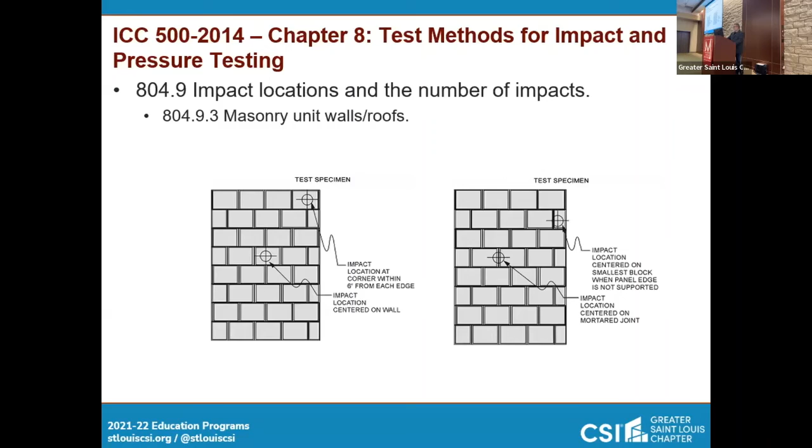I've seen photographs of elementary schools that have steel shutters that are hinged open, and they have tack board on the one side so that when they're open, they can put drawings and pictures from the students in there. And then if they have to, they slam it closed, put a bar down, and they're protected. Those systems have been tested similar to this. Minimum 2 impacts on this one as well, unless you get permission to do more.

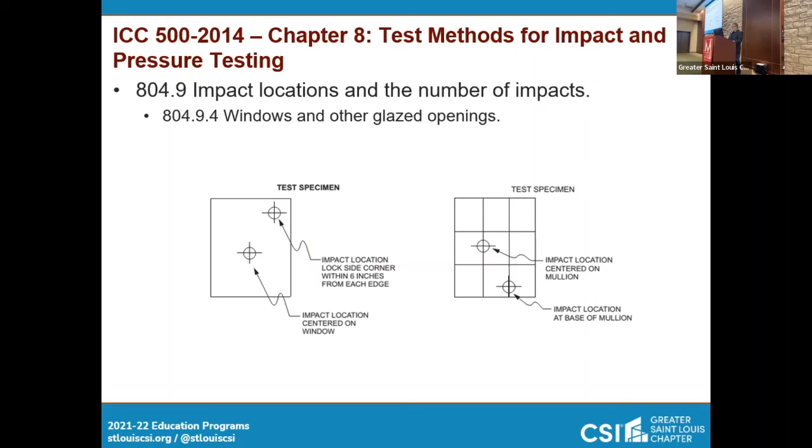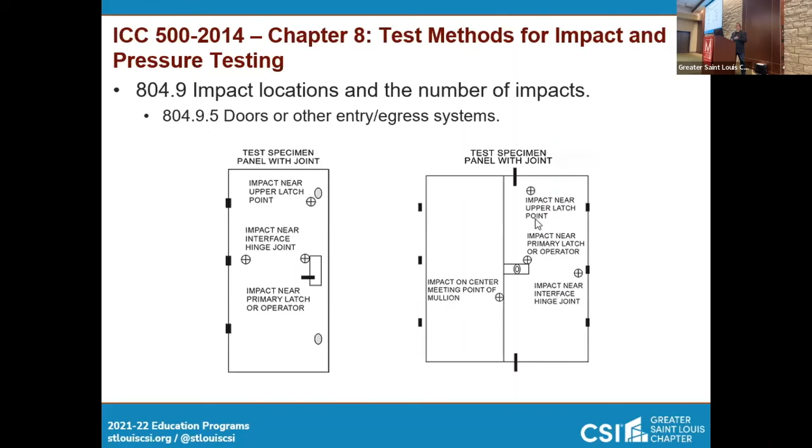The harder component is a door, because the door moves and is open. I know Assa Abloy makes doors that have been tested to this criteria. I believe Allegion has 2. I'm not 100% certain on that.

But the testing on the doors is 3 locations: near the upper latch point, near a hinge on the one side, and near the handle. Similarly, on a double set of doors, you got to hit it once near the center, just in case. Keep in mind, these are 2x4s, 15 pounds, 100 miles an hour for St. Louis.

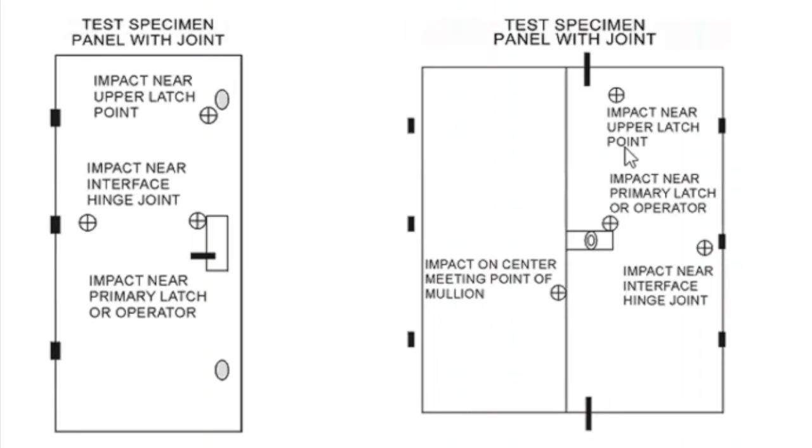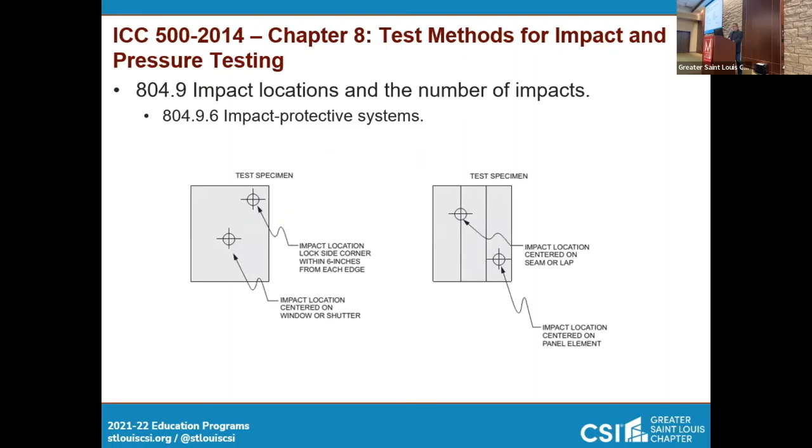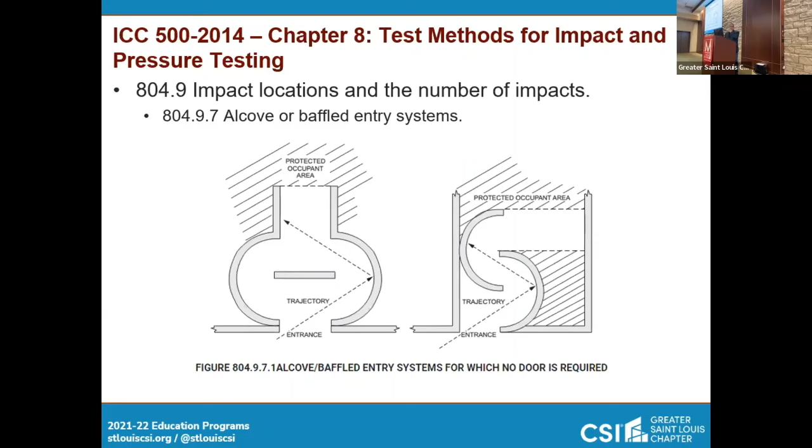The next one, though, is a little different because an occupant could be hit by debris, not hitting a second wall. The theory is that it hits the one wall, it slows down, it hits the other wall, it becomes non-harmful. I don't know how they figured that, but I trust them.

The missile on this one, though, the door still has to meet the requirements of a tornado. However, the testing criteria dropped significantly. Instead of a 15-pound 2x4 at 100 miles an hour, it's a 9-pound 2x4 at 50 feet per second. So it's slightly less weight and speed.

It can be reduced. The test on this one can be reduced to 9 pounds at 50 feet per second because it's semi-protected. It's not going to take a direct hit. It's at an angle. So you're protecting the occupants from a direct strike.

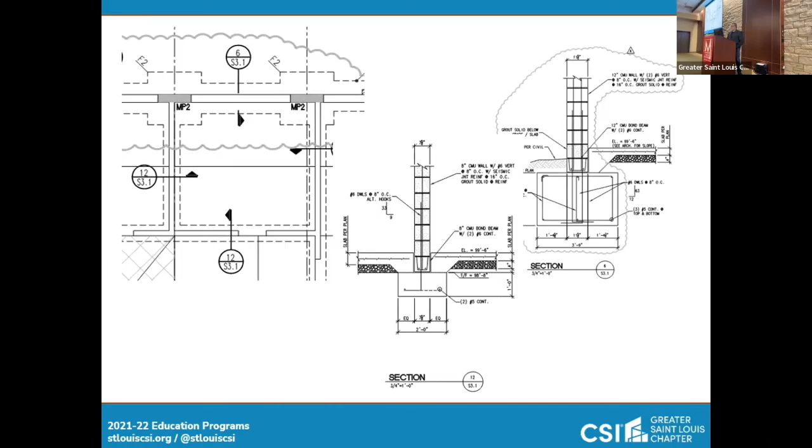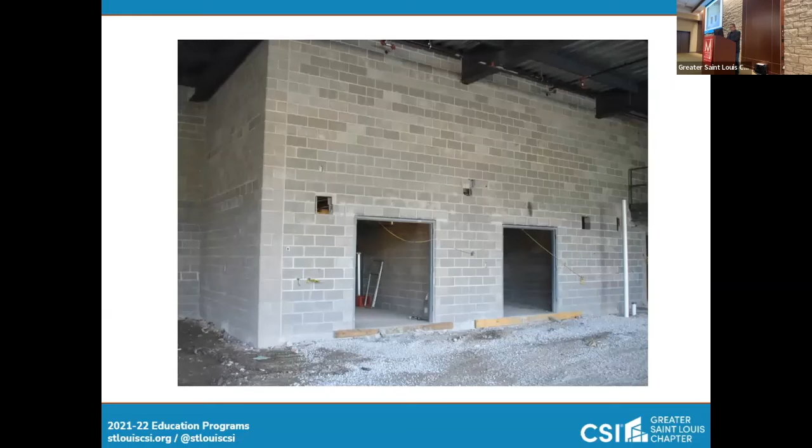And the opening protective. This is the back wall in that 12-inch CMU wall. It's open to the outside. Keep in mind, this is the previous version of the code. But what we had them do was basically put a grid of bars in there that were prescribed by the old code that would shatter anything that was possibly coming into the room.

It was over the heads of everybody, but it was, let me see here. Number 5 rebar at 8 inches on center at the opening. Minimum embed of 8 inches into the block that's fully grouted all the way around it. So anything hitting that would get stuck in it or get shattered. But that's the ventilation for that room.

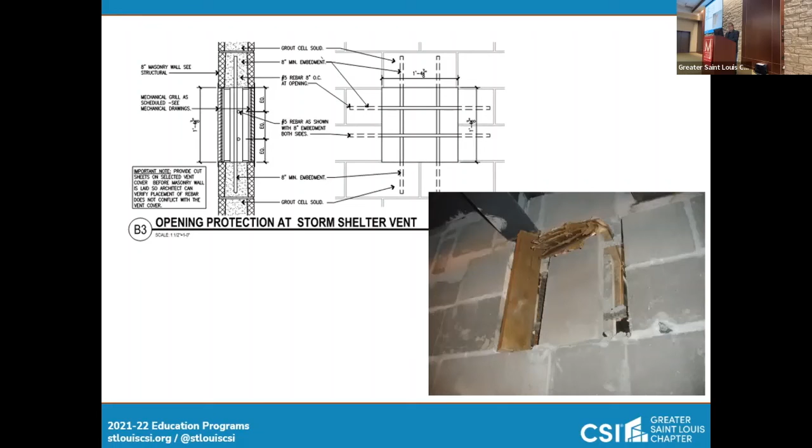Here's an example of a residential storm shelter. You can see the venting they've got here. Got their CMU walls. They put their forms up, and I don't know what they did when they poured the concrete, but I'm assuming it was a grout that they used to put in here, and then they just filled the rest of it up with concrete to form the lid of that shelter.

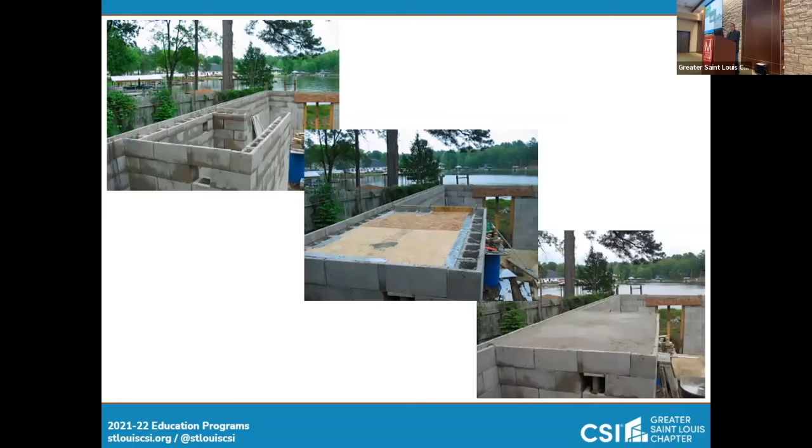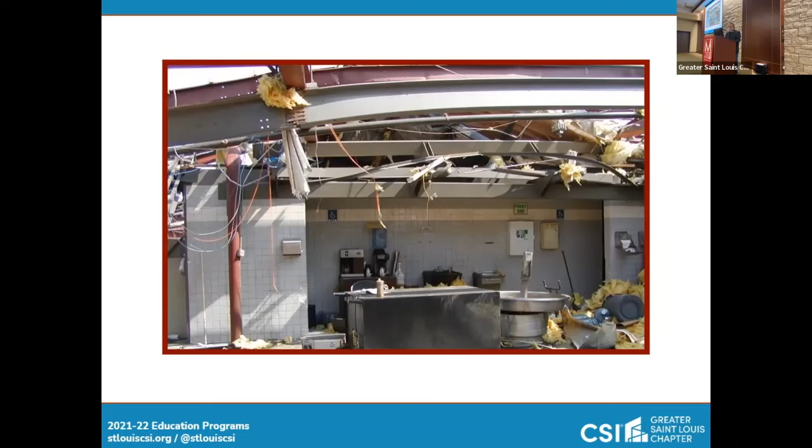That is my presentation. I hope I didn't bore you all to death. Codes are a really interesting thing, I know. Any questions?

Anything online? Yes. For the concrete roofing that you're talking about, are there reinforcement requirements also called out in the code for the decking? There are concrete reinforcement requirements. I don't know what they are. I didn't get into that. That's part of chapter 3, where they prescribe the layout of the reinforcing steel and everything. But yeah, there is.

Have you heard anything about expected changes that might come from the Amazon warehouse and those tilt-up panels that came down and all of that? Good question. Heard about? No. Will there be? Almost definitely. After any disaster, this is 2014's version. This is the direct result of what happened in Joplin and the Oklahoma tornado spree in Moore, Oklahoma.

So I'm sure there will be changes as they've built these facilities on this code. They're going to go back and check these buildings that were built to this code and see where they succeeded and failed, and make modifications as required. That's how the codes get updated. I think that's the reason we don't have non-fire rated metal composite panels now, because of the Grenfell thing. So, any other questions?